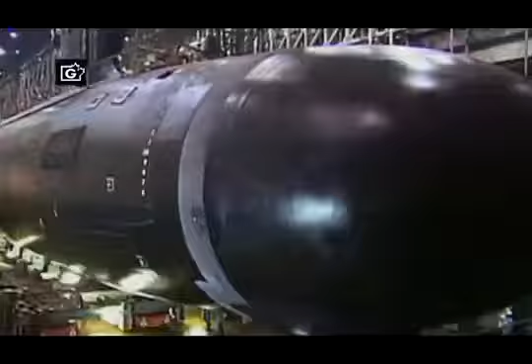The future of submarine warfare is here: the USS Virginia. Tricked out with high-tech capabilities that allow it to sneak up to a coastline and secretly watch and listen to potential enemies, ready to respond with unwavering force.

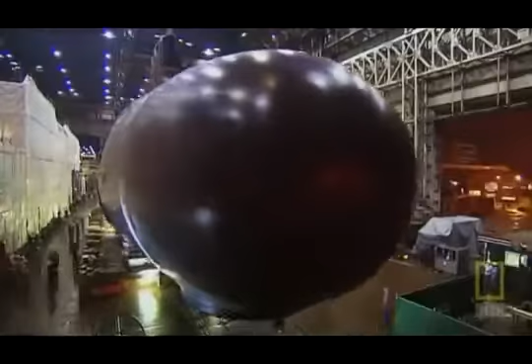This mega sub is in a class of its own: the all-new Virginia class. This is an amazing ship. Named the USS Virginia as the first of a new class, this amazing sub has staggering capabilities. It's the most advanced and versatile submarine in the world. We consider this like the Ferrari of the subclass.

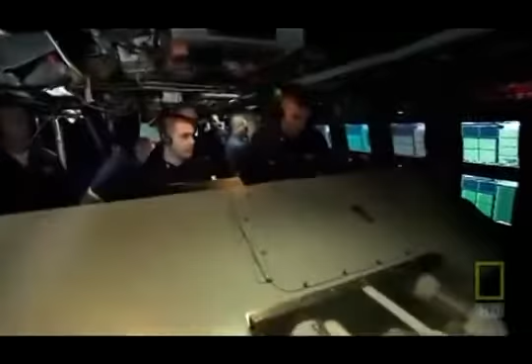It can launch attacks on other vessels using devastating torpedoes and can deliver cruise missiles 1,600 kilometers inland with pinpoint accuracy. To escape potential enemies, the USS Virginia can dive to depths of up to 240 meters.

But what elevates this new supreme sub to a class by itself is its astonishing spying ability. This sub has been called the ultimate eavesdropper, and for good reason. The Virginia has the most sophisticated sensors ever fitted on an American submarine. It can see and hear better than any US sub ever built.

But even with such technology, the Virginia must get in close to potential enemies. And she does, extremely close. She uses a revolutionary automatic navigation system, which allows the Virginia to inch itself through shallow waters to an exact coordinate. The question for a Virginia is how slow can you go? How well can you take that 8,000-ton submarine and control it in coastal waters a couple feet off the bottom? Can you move that ship inch by inch?

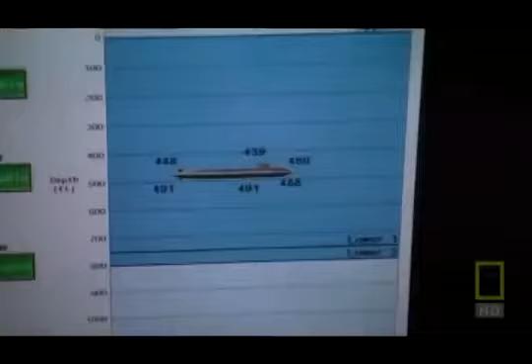Like a stealth fighter, it has the ability to remain undetected. But unlike the Stealth, the Virginia can stay motionless underwater for up to 3 months if needed. And we could be sitting there for days and weeks and years, and you'd never know we were there. This is a sub like no other.

With such covert potential, the Virginia's intelligence gathering is second to none. It can also deploy elite forces like Navy SEALs at a moment's notice. Such adaptability makes this sub one of a kind.

And the USS Virginia is one heavy sea creature. At 7,800 tons, it weighs as much as 1,600 killer whales. This monster sub is 115 meters from stern to bow. If you were to lay the Statue of Liberty down next to it, the Virginia would still outstretch it by 22 meters.

But how does such a beast move so effortlessly underwater? The dynamic thrust of this megastructure is a nuclear reactor. The design and operation of the reactor is top secret. But what we do know is that it's an astonishing powerhouse.

A compact nuclear reactor converts seawater to steam. The supercharged steam then spins the massive turbines, which in turn propel the sub. The reactor also powers all electrical needs for this high-tech super sub. And what's more, the nuclear reactor on the Virginia has a 30-year lifespan. Translation, it can go that long without ever needing to be refueled. That's twice the average lifespan of nuclear reactors on other US attack submarines.

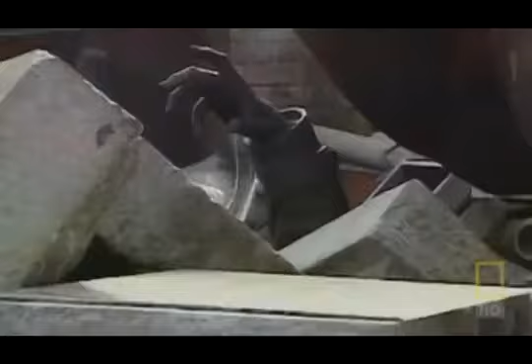But in the early 90s, the political climate dramatically changes. Almost overnight, the Soviet Union collapses. America's archenemy has simply disappeared. The costly arms race between the superpowers is no longer relevant. In this brave new world, it's inevitable that defense budgets are slashed. Every division of the military is a target for cuts. Submarines like the Seawolf class are simply no longer needed.

But as the 1990s develop, new enemies of the United States and her allies emerge. Small terrorist groups in tyrannical countries like Iraq and Somalia cause the military to rethink spending. If you look at the threats we're dealing with today, a lot of them are coming from third world countries, small countries, where we need to take the battle to them and prepare a battle space around their coastlines. What is the point of a huge navy if these terrorist armies have no sea power? Why does the US Navy need a submarine at all?

Good question, and one that was being discussed at the highest levels in the early 90s. In today's complex world, the military needs to be ever more informed of enemy activity. But US defense already has sophisticated spy planes and satellites. They can see every detail from several kilometers high. They also have better ground reconnaissance and a superior spy system. So what can a submarine offer?

But the Navy has set strict guidelines for the submarine designers. The new class of sub must have awesome spy capabilities. She must negotiate shallow waters with pinpoint accuracy. There, she must remain motionless for days on end, regardless of currents and sea drag. She must be able to deploy high-tech weapons to raid on an enemy whenever needed, and she must also be able to dispatch elite special forces like Navy SEALs. The new super sub must have stealth-like maneuverability and be able to disappear underwater for up to 3 months at a time.

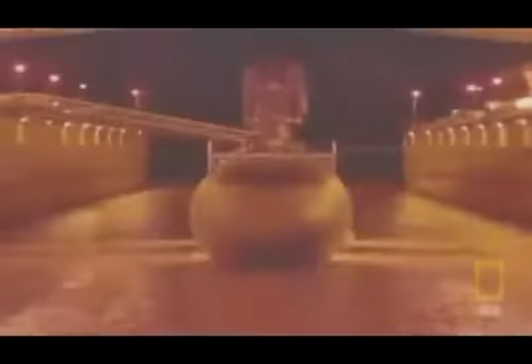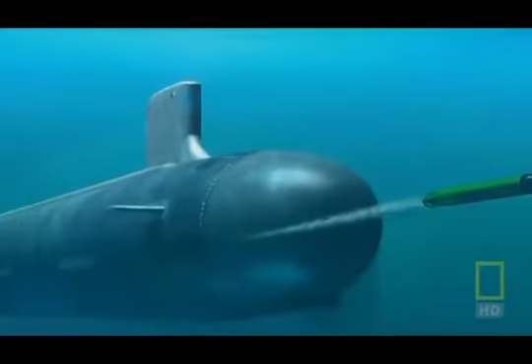It's a tall order by any standards, but there's a catch. They have one year less than it took to build the first Seawolf. And incredibly, there's an even bigger catch: it has to be made for 20% less money. With such constraints, there were many in the submarine industry who thought it was simply impossible. I think the reaction is always one of, how can we do that? We've never done it before. If the Navy can make this work, it'll provide a major new weapon in the US arsenal. But if they fail, all US subs could be in question.

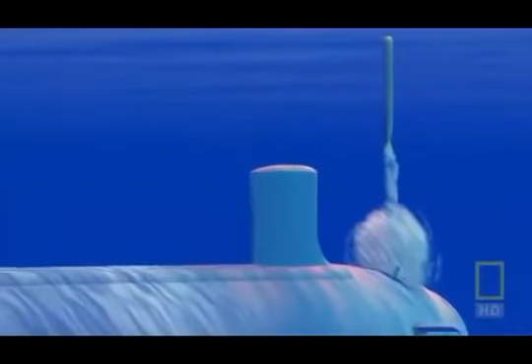It's 1996. The US government needs to get up close and personal with new terrorist enemies. The Navy insists that submarines can still help in this thorny urban war. They claim they can build a new class of submarine: bigger, better, quieter, and more deadly. But there's a catch, a big one. It must be built in less time and for a great deal less money than the previous attack submarine, the Seawolf class. With such limitations, this project looks more likely to sink than float.

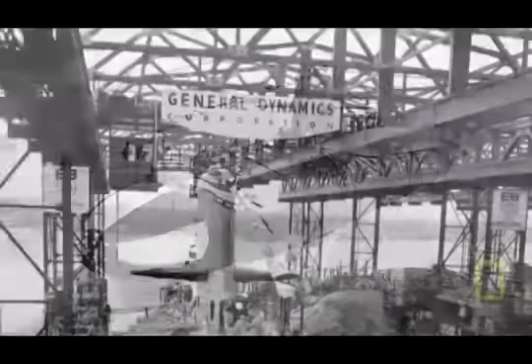The Navy decides to offer the mammoth design challenge to a trusted company, Electric Boat. Based in Groton, Connecticut, this company has enjoyed bragging rights that span over a century of ship and submarine building for the U.S. Navy. The first sub they built was the USS Holland for the Navy in 1900. The USS Holland revolutionized the U.S. Navy, marking the beginning of more than a century of military submarine building. Electric Boat's expertise is second to none, but some government officials already fear that this massive challenge may simply be impossible.

Despite the huge red flag, Electric Boat finally agrees to design and develop the new Virginia class. But to bring it in more cheaply than the Seawolf, they'll have to completely change the way submarines are built.

It starts with paper and wood. In the past, they would have drawn up initial plans on paper. Previous classes of submarines were designed historically, like probably any other large construction project, with two-dimensional drawings, blueprints. But the problem with two-dimensional plans is that different designers can't always view each other's layouts. If two engineers from different departments end up competing for the same space, it could lead to lengthy and costly delays. On this tight schedule and budget, there's no room for such error. It'll put the project behind schedule even before it started, and it could tip the balance and mean the end of the new super sub.

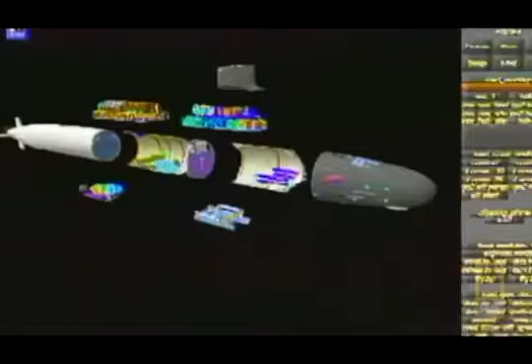The team needs another solution. They turn to new computer-aided technology, the benefit being that the whole model can be seen in 3 dimensions. This will mean that each department can quickly see what the other is doing. If it works, it'll save the company a fortune and help design a more efficient sub. But if it doesn't work, it could mean the new super sub is doomed from the start.

The president of Electric Boat finally decides to take the risk. He came in and finally took all the drafting boards out of the plant and said, okay, go for it on your computers.

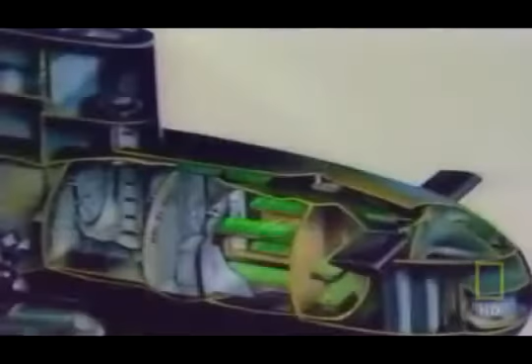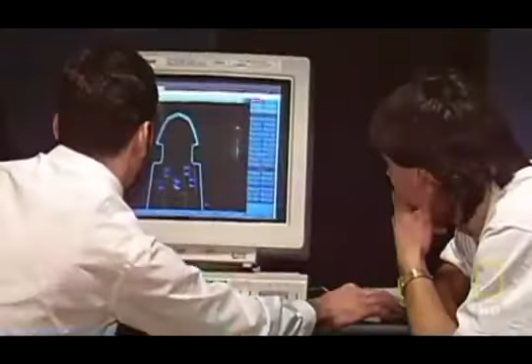Before the Virginia class, when a submarine was designed on paper, builders would then construct a life-sized wood mock-up of the plans just to make sure everything fit. But with the computer-aided design of the Virginia, that step could be skipped. All of the test fitting could be done right there on the screen. It is the first time that a U.S. Navy submarine is completely designed via computer.

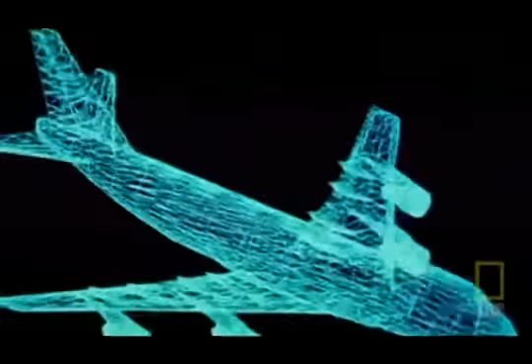And the program that would make this computer-aided design possible is already proven technology. Known as the CATIA program, it has effectively been used in the development of airplanes by the Boeing Corporation. Electric Boat figures there are enough similarities between a plane's fuselage and a submarine to take the plunge.

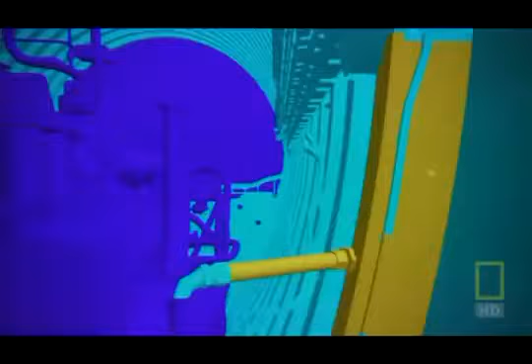It proves to be the right decision. All the various designers have access to the computer 3D model. This allows engineers to work in the same virtual space at the same time. Designers can now view all the plans to make sure they don't interfere with other layouts. The piping designer is running his pipes and I'm running my cables. We can go in and detect interferences day by day.

Every part of the ship is scrutinized for function and economy. So creating the sub on a computer seems to allow for the more efficient test fitting of systems and parts. But the next challenge facing designers is figuring out how to create spaces for people. Workers need room to do installations, and sailors need space to do their jobs. So in order to ensure those spaces are adequate, designers welcome the help of this guy.

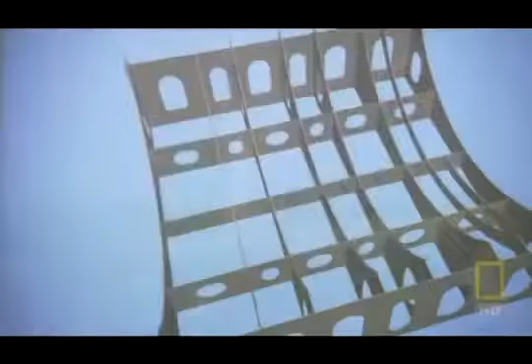Meet ErgoMan. ErgoMan is a computer-generated image of a human being that comes in 3 virtual sizes: 1.7 meters, 1.8 meters, and 1.9 meters. Whatever movements a human can do, ErgoMan can replicate. Then when the ergonomically correct envelope has been pushed and movement is made that is not humanly possible, ErgoMan clearly lets engineers know by simply turning that body part red, enabling the designer to adjust the space he's working on.

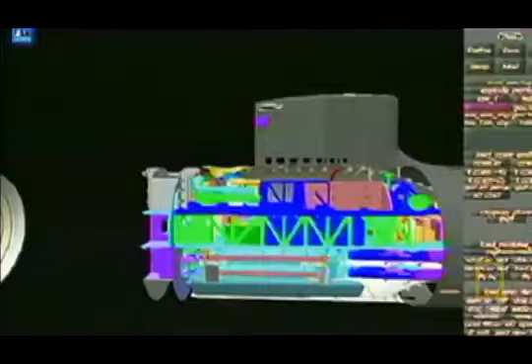This revolutionary technology could save the company millions in costly redesign. It could also guarantee that the crew will operate at maximum efficiency. The computer-aided design also helps in one other crucial way. The future of warfare is uncertain. To meet that uncertainty, this incredible sub must be able to adapt to new situations. As modern warfare changes, so the Virginia must adapt to meet it head-on.

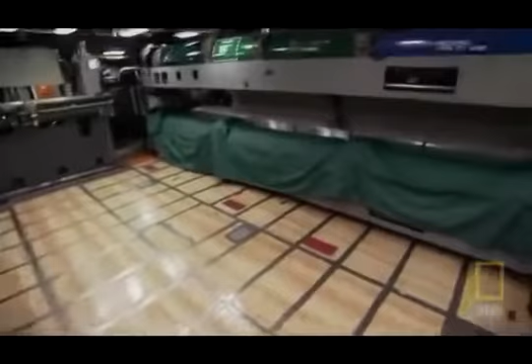To create this adaptability, the designers of this super sub create what's called a modular design that incorporates an open system architecture, meaning the skeletal structure of the sub includes large open spaces. These open spaces can house prefabricated modules such as weapon systems or sonar technologies. These modules can easily be inserted as one complete unit.

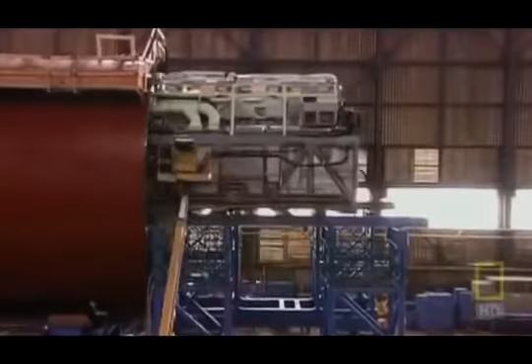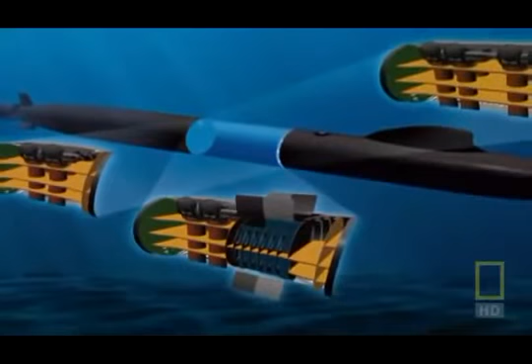This modularity will allow future versions of the Virginia class to house newly developed systems in the existing Virginia class layout, without the added expense of having to develop an entirely new class of submarine to house new technologies and capabilities. A remarkable cost-cutting development in the design of a submarine.

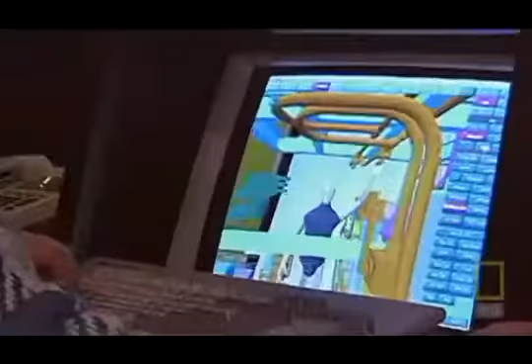If it works, this will be the most extraordinary submarine commanding the world's oceans. But designing it is just one problem. Making this ambition a reality is quite another. With an even tighter budget than past submarines, this is going to be a massive challenge to execute. And now there's a new problem. Having spent millions on the design, the Navy may not have enough money left to build it. It looks like the prototype of the new Virginia class may never surface.

The Navy is underwriting an enormous new project to build a new class of submarine that will be more versatile than any ever built. But it has to be constructed in less time and for less money than the previous attack submarine, the Seawolf. The design and development have been skillfully and successfully carried out by Electric Boat. And for the first time, a US Navy submarine is completely designed via computer.

It's a massive achievement, but there's a problem. The Navy's budget for the Virginia program is running out. It could lead to the end of the new super sub before it's even floated. But then Electric Boat does something unprecedented in its history.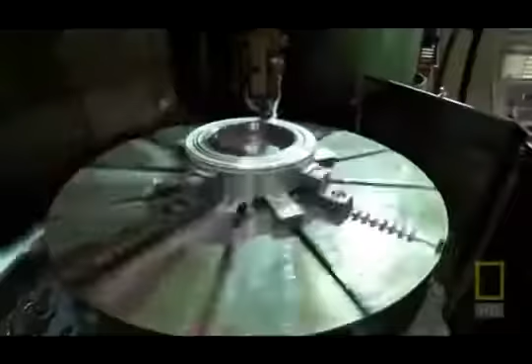For years, Electric Boat has been in competition with Northrop Grumman's Newport News, another heavy hitter in the shipbuilding industry. Now Electric Boat proposes that they combine forces with their old rivals and do something that's never been done before: build the submarine together, a process they call teaming. They figure that combining resources and brain power will allow them to work more quickly and more efficiently.

The proposed alliance can lead to massive savings, $700 million off the cost. But can these two historic adversaries put aside their differences and build a super sub for a reduced price? How can they manage such a massive project across two companies? As we've said, it's never been done before. But the allied companies must make it work. They have little choice, as the Navy has no more money to offer.

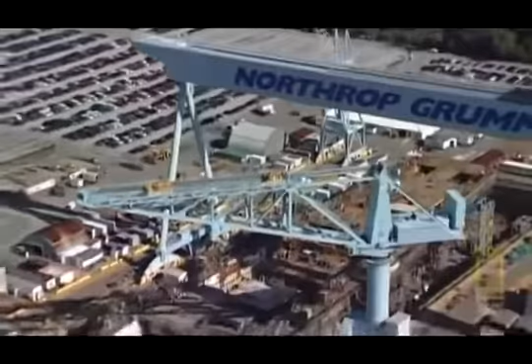Making a super sub for less money and in less time than previous attack subs will only be possible if the two rivals collaborate. It's a colossal and dangerous undertaking. If they get it wrong, it could spell the end of the US submarine program. This is a time when the Navy must prove a submarine's worth in a changing world.

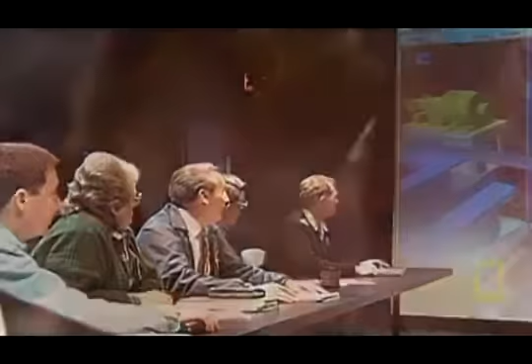The two-company alliance agrees that the only way to meet such demands is that there can be no delays. A major setback could erase any cost savings. But such efficiency in submarine construction is unprecedented. Is this project simply too ambitious? Could it be destined for the deep?

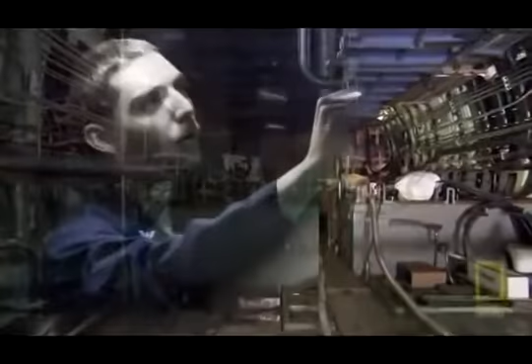In 1998, construction finally begins. Like all submarine building, it begins with the most crucial component, the hull. This is where the crew and weapons are housed. If it's not strong enough, the lives of hundreds of men are at stake, as is the multi-billion-dollar submarine. Not just a costly mistake, it would be a national catastrophe.

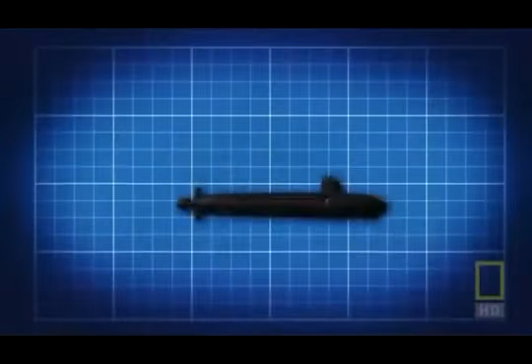Consequently, the hull for this sub isn't just made out of simple steel. It must resist unbelievable pressure. The Virginia class needs to reach depths up to 240 meters. Here, it's difficult for an enemy to find them, giving the submarine maximum safety from attack or detection. But at these depths, there's immense pressure. The steel hull must withstand a massive 26 kilograms of force per square centimeter—the equivalent of a dinner plate strong enough to hold up the weight of an elephant.

Getting the steel strong enough to endure such pressure is crucial. The manufacturing of this special metal is a military secret, but suffice to say, it's strong—extremely strong. But now the problem is how to bend such heavy-duty steel. They use a machine that supplies up to 4,500 tons of pressure, over 30 times the pressure exerted by a car-crushing machine.

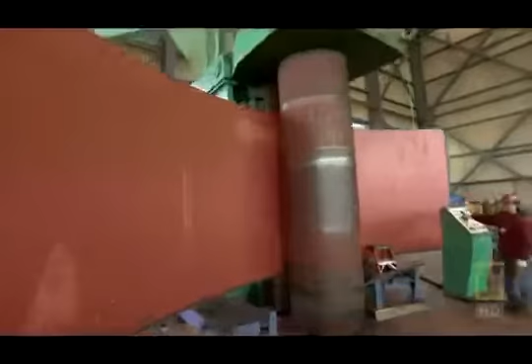The massive drum shapes and bends the huge plates of steel. Once bent into shape, the steel is mounted onto rib-like frames. It's then welded together into cylinders. This is a critical moment.

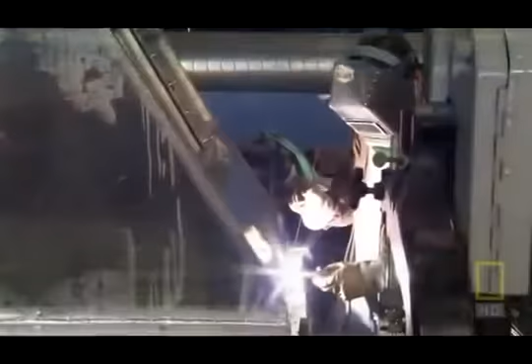In the past, this was done by teams of hand welders. But such are the stresses on a deep ocean submarine that even one bad weld could lead to disaster. There's only one answer: robots.

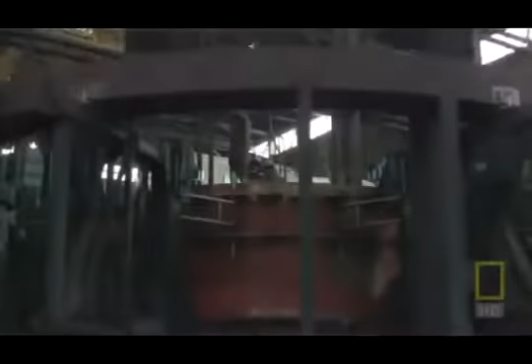These assembly robots can work round the clock and rarely make mistakes. The weldments that come out here are better than 99% first-time yield, which means the inspection process shows less than 1% failure rate. It's a costly business, but this is something that can't afford to fail at any price.

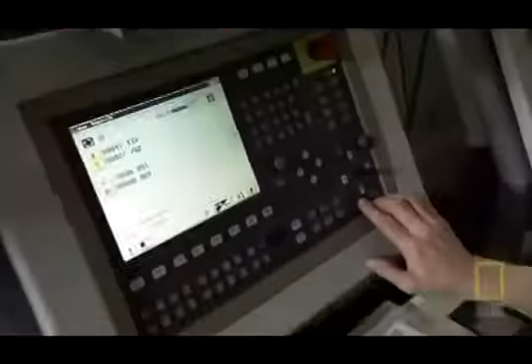To make sure the welds are perfect, they're inspected by X-ray. Any imperfections, such as an air bubble in the weld seam, could be just enough for the hull to weaken and give way to the crushing forces exerted deep below the surface. If the X-ray machine shows up any imperfection, it's meticulously repaired. Amazingly, once the seam is perfect, the welds can create a bond that is actually stronger than the original steel—a comforting fact when you're 240 meters below sea level.

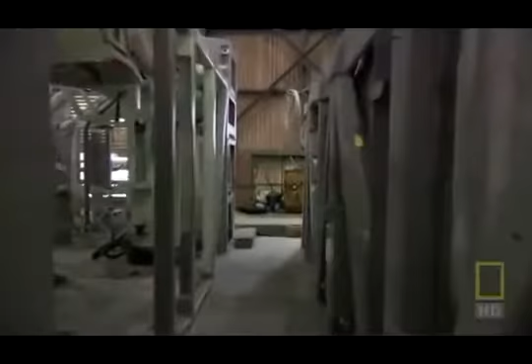Once the separate sections of the hull have been created, they start to construct the skeleton. Here in steel processing, they'll make floors, walls, and all the sections that comprise the submarine's framework. Again, robotic manufacturing reduces mistakes and speeds up the process, crucial when the alliance companies are desperate to cut costs and time.

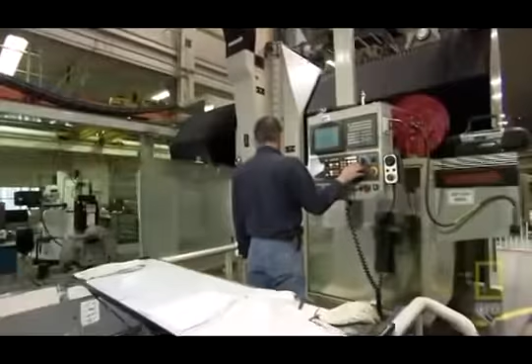Today, modern technology works with electronic data that comes right over the line and feeds the machines. This incredible laser marker is one of a new generation of robotic assembly tools, designed to eliminate human error. It's programmed to follow the computer design with better than pinpoint accuracy. Basically, it's the only marker of its kind in the free world that we're aware of.

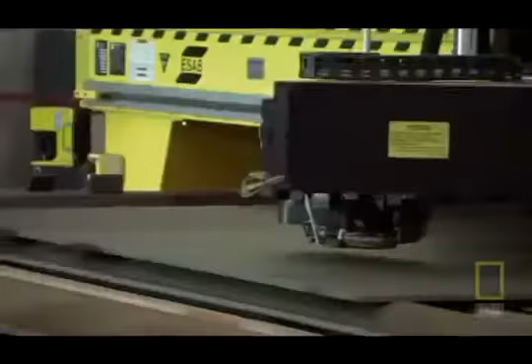But will this new technology work? It's never been used in submarine construction before. The machine passes quality control with flying colors. It's just one of many innovations in building this unique sub, and so far, the project is going well.

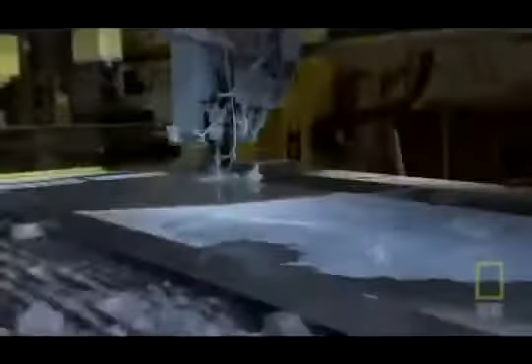Now the marked steel must be cut. But how do you cut such strong steel? They use a hugely powerful cutting machine known as an abrasive water jet. Here, a constant stream of water acts as the propellant for 80 grit flakes of garnet, which cut through the steel. The advantage to this method of cutting with a cold water propellant is that there is no heat-affected zone, thereby eliminating imperfections caused by expansion, contraction, and melting.

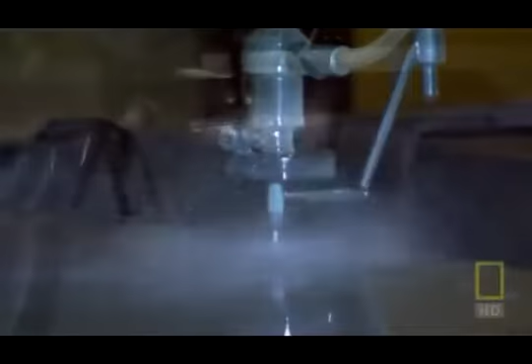Even though garnet is not the hardest abrasive that could be used, it's seen as optimal because it's hard enough to cut without causing too much wear and tear on the water jet's nozzle. The powerful cutting stream strikes the steel with 3,900 kilograms of force per square centimeter, strong enough to cut through a 30-centimeter thick piece of steel.

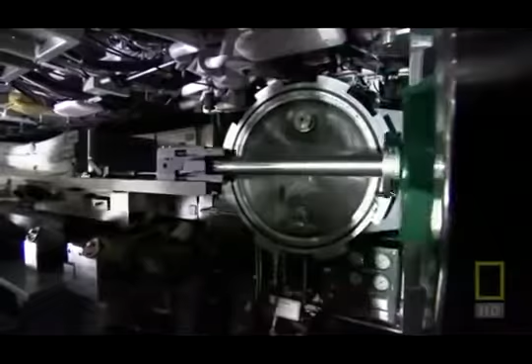Once cut, the sections are ready to be welded into place, making up the submarine's skeletal shape. While these sections are being built, other important modular sections are constructed in tandem. Living quarters and weapons are built outside the submarine before final assembly, allowing ease of construction. They can then be rigorously tested before installation.

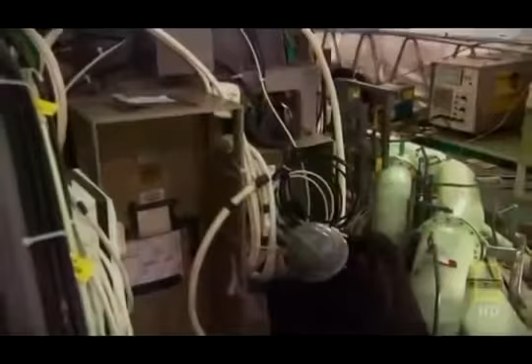The Virginia's command and control module is the most complex module to be built. It's the brain of the sub, where crucial functions are executed and surroundings monitored. It's also where the awesome weapons systems are controlled. If any part of this goes wrong, the whole submarine could be rendered inoperative and end in a voyage to the bottom of the sea.

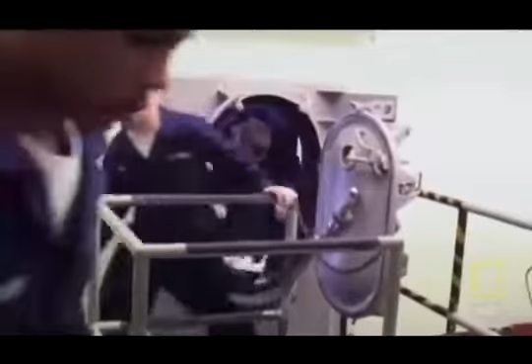So the Virginia's separate elements—the modular systems, the internal structures, and the outer hull—are built with efficiency. But these separate sections have not yet been integrated into a complete submarine. And without a complete submarine, the sailors destined to serve on the Virginia can't set foot onto it and get a feel for its inner workings. Yet they must have a working knowledge of the Virginia's unique operating systems when they're charged with manning the complete submarine.

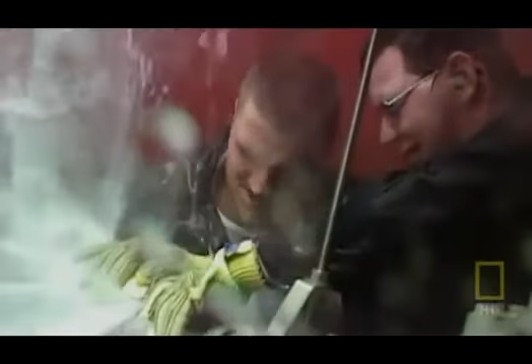So how do sailors prepare for duty on board this unfinished sub? The Navy would have to get creative to ensure that the human element to this mega sub, the US Navy submariner, would also be finely tuned for service. This is when the mission could sink or swim.

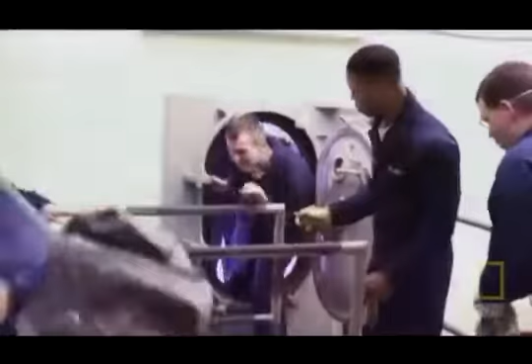The USS Virginia is a super sub in the making. Nothing like it has ever been built before, so there's no chance of gaining crew experience from other submarines. But the new sub must be fully tested before sea trials. That includes the crew—to operate this new class of submarine will require unique training. But this is a virgin sub, and no one knows all its workings. Like the rest of this project, this too will be a challenge for the Navy to resolve.

Training begins with every submariner's nightmare, in mock facilities like this fake engine room, built to simulate a flood. And even though these men are not on an actual sinking sub, this scenario is very real to them. They know that a flood could happen when they're at sea, and the only way to survive it is to stop the water from rushing in.

Flooding in the engine room! Flood control has been activated in the engine room. Pumps are manned. Damage control system.

In the heat of battle, the sub can't resurface because the enemy will spot it.

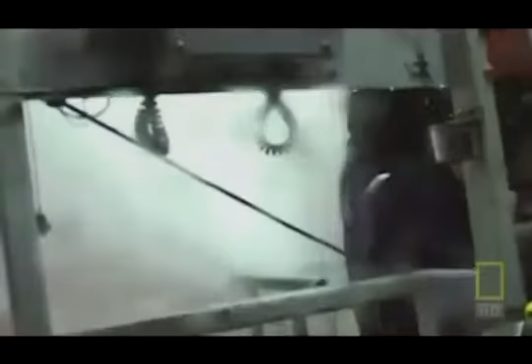If too much water gets in, the sub takes on too much weight, permanently ditching itself on the ocean floor. The men cannot escape through the hatch because they're so deep—the water pressure will crush them. If they can't stop the leaks, they will be trapped at the bottom of the ocean, buried alive in an iron coffin.

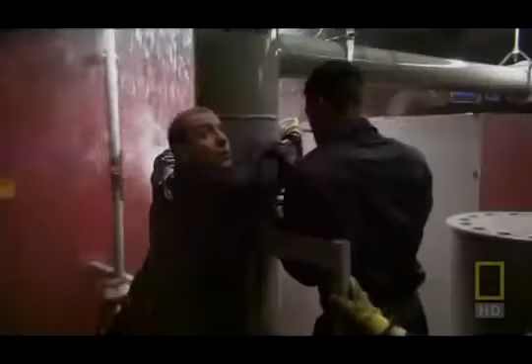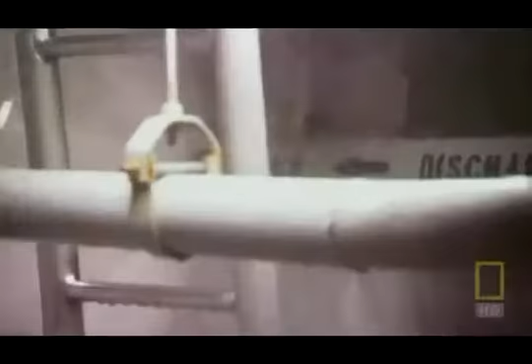These sailors are under the close scrutiny of their commanders. To block small leaks in pipes, the sailors hold plugs in place with rope they call bandit twine. For larger leaks, they patch the holes with rounded metal plates called strongbacks, secured with metal straps simply called bandits.

Commanders expect the sailors to keep their cool and keep their focus. Fortunately, after a rigorous and stressful series of tests, these sailors get the thumbs up from their commanders. These are good men to be spending months on end with, and that's what a sub is all about: living in cramped conditions and still functioning well in the face of danger. This is no place for claustrophobics.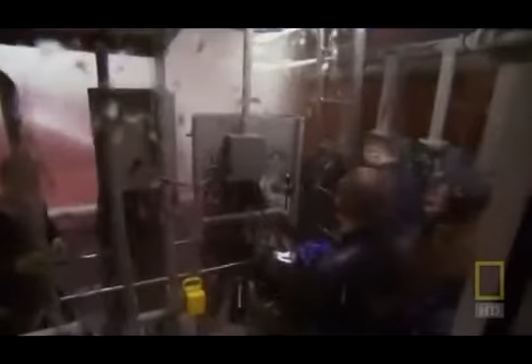Every sailor on board the USS Virginia, as well as any Navy sub, whether the commanding officer or the cook, must know how to mitigate against leaks so that all hands can be helpful should such an emergency arise. But submariners must do more than train for emergency situations.

They must also train to do the specific jobs they're assigned to, such as steering or sonar operations. This requires a familiarity with the sub's operating systems.

Sonar and navigation have traditionally been kept separate due to noise factors. Using new technology and space-saving design, these two disciplines have been brought into one central command post for the very first time. When we first started, it was overwhelming because traditionally, the fleet returning sonarmen that came to the Virginia had a mindset of the way things used to be, where we were in a room separate from everyone. We could set up the sounds we needed to hear in our room and no one else was distracted by them. But before sea trials begin, the specialist crew must get familiar with working together.

With little alternative, the Navy agrees to invest in building a simulator. Every detail of this high-tech simulator is a functioning replica of the future sub's control room. This is a very unique trainer - it's specifically for the Virginia class.

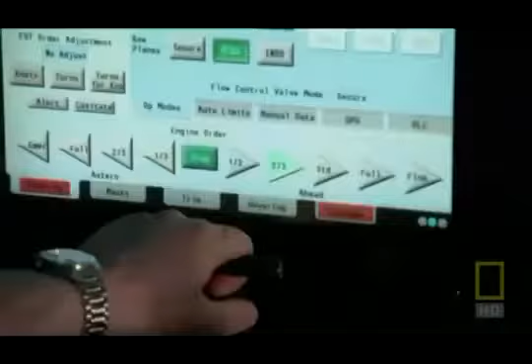For the first time, the crew get their hands on the same controls as the new super subs. We were confident that the ship was going to act very similar to the trainer as far as motion, but the procedures and everything we train on over here are identical to the ship.

One thing sonar operators on the new sub will have to get used to is working alongside their colleagues.

Sonar has always been monitored in separate rooms to avoid noise interference. But sonar operators destined for the Virginia must get used to working in the new shared space of the control room.

After initial reservations, the sonar team begin to see the benefits of working with other engineers. I think overall, in the big picture, it's a benefit. It gives me, as a sonar supervisor, a larger tactical picture of what the boat is doing.

Here in the simulator, operators will get their first experience of a revolutionary innovation. For the very first time, a US submarine is being built without a periscope. Normally, a periscope extends up to the sea's surface, and using a system of mirrors, it allows one person to scan the horizon.

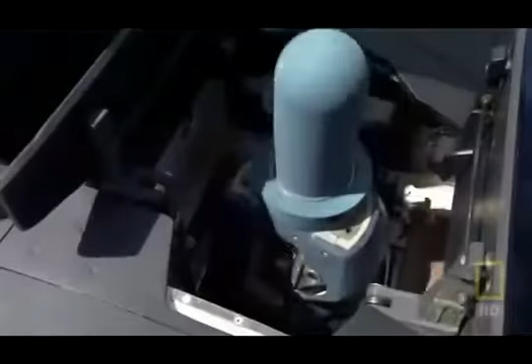But the ultimate eavesdropper needs to be much more aware of her surroundings. Instead of a periscope, she has a mast with multi-sensors and cameras that enable images from all sides. These sensors, known as photonics, are wired to various monitors in the control room.

For the first time in submarine history, everyone in the control room monitors surface activity. And because they're all in the same room, communication is much more responsive. Control, I'll brief them that we've gained an enemy warship.

While the crew is being put through their paces, construction of this super sub nears its end. The separate hull sections are outfitted with the internal elements they'll house, and then pieced together section by section until a full-length submarine finally emerges. By August 2003, the USS Virginia is ready for the water.

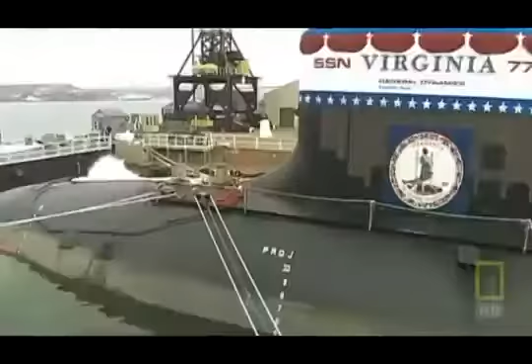Against all odds, the alliance companies have done it. They've built an extraordinary new submarine, more technologically advanced than any in the world. It's an amazing achievement. Right now, any celebration could prove to be premature. Unless they get the next and most important phase right, the whole project could become an expensive flop.

Virginia must now endure extensive sea trials. The super sub has to prove itself where it really counts, in the ocean. Often in the past, testing new subs has uncovered countless problems. These have proven to be time-consuming and extremely costly.

The USS Virginia has been built using revolutionary methods. Time and vast quantities of money have been shaved off the budget. But if this new super sub is to succeed, there can be no slip-ups during trials. It'll knock the whole project off course.

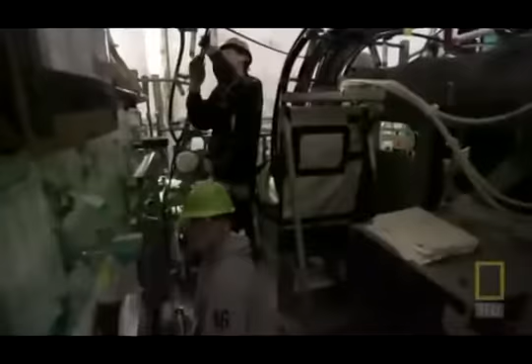The construction of the all-new USS Virginia is at last complete. It's taken 6 years and cost the Navy billions of dollars to build, but still less time and money than its predecessor, the Seawolf.

It's a mammoth achievement, but by itself, it's meaningless. The real test lies ahead.

If there are errors now, the huge investment could sink to the depths. It could take years to fix any problems that surface, likely putting the project beyond economic sense. It could even spell disaster for the whole submarine division. In the past, problems have been common at this stage, but this project simply can't afford to fail.

It's now do or die for the new Virginia class.

August 2003. The USS Virginia is finally launched. Over the next several months, they will put the sub through extensive tests, known as alpha trials.

This is when things can, and often do, go wrong. Previously, subs would factor in time for repairs, but in this new economic climate, the Navy and the Alliance simply don't have that luxury. The Virginia must ace the test.

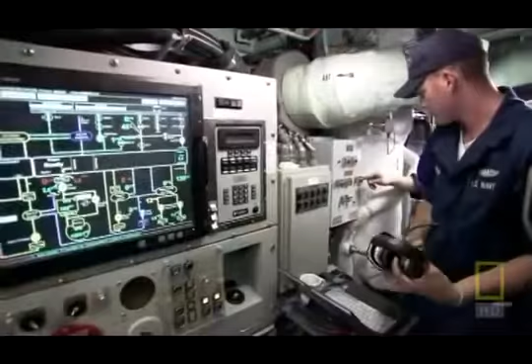Historically, the first ships of a class wind up with significant problems. As the USS Virginia heads out on her maiden voyage, the captain and crew will begin testing all her major functions. All the sub's technology must be tested.

They start with sonar. It is the traditional way a submarine sees, even through murky water. The system is based on transmitting and receiving. The main feature of the system is the sonar sphere, housed in the nose cone.

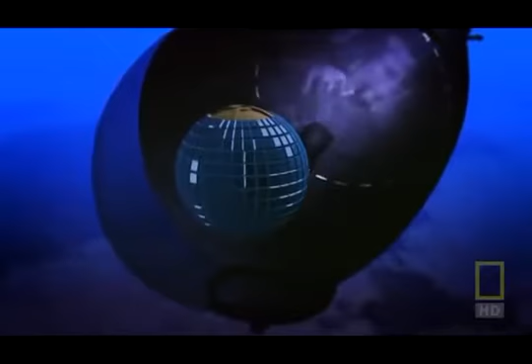The sphere is lined with hundreds of hydrophones that act as the ears of the sub. They're called passive sensors. Their job is to listen to all sounds coming from outside the sub. A giant baffle protects the sonar sphere from internal noise interference.

The sonar sphere also has what's known as active sonar capabilities, which is when the sonar releases noise pulses and gathers a clear picture of the sub's surroundings based on the bounce back of the sound waves.

Along with the sphere at the bow, there are 6 side-mounted sonars, 3 on each side. These provide a more complete picture of the submarine's surroundings. There's also sonar that can be released from the back of the sub and towed with a line. This area behind the sub is often referred to as the blind spot and would otherwise be vulnerable to attack.

Because the Virginia is built to operate in shallow waters near coastlines, it is likely to encounter minefields set up by enemy forces to keep our Navy ships out of their waters.

These mines are typically scattered throughout the water, anchored into position with chains. Because of this danger, the USS Virginia is the first submarine in the fleet to house a chin array, which works in combination with a sail array to provide a better picture of what lies ahead and make it more effective at spotting mines so that they can avoid them or detonate them from a safe distance before running into them.

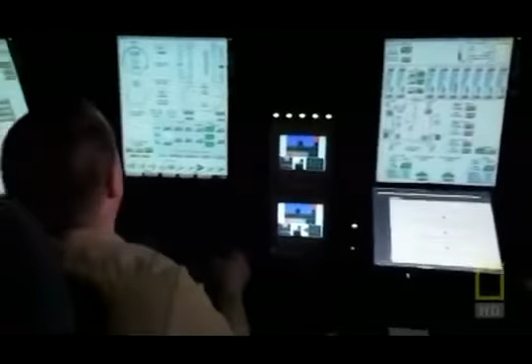If the Virginia were to park itself on the ocean floor, currents and tides would cause it to drift. But the Virginia's automated hovering capabilities allow it to maintain its position near the ocean floor, compensating for currents and tidal forces. The Virginia's unique ability to remain locked into position provides another major innovation.

As the sub can remain in a fixed position, it's easy for elite forces like Navy SEALs to swim in and out of the escape hatch. No other US submarine has a more effective way of deploying special forces.

No other class of submarine in the fleet has a built-in Navy SEAL staging area. This 9-man lockout trunk allows an entire team of SEALs to exit and enter the sub. Once out, they grab mission-specific supplies from lockers located in the fin-like structure on the top of the submarine, known as the sail. And then they're ready to make their quiet approach to land.

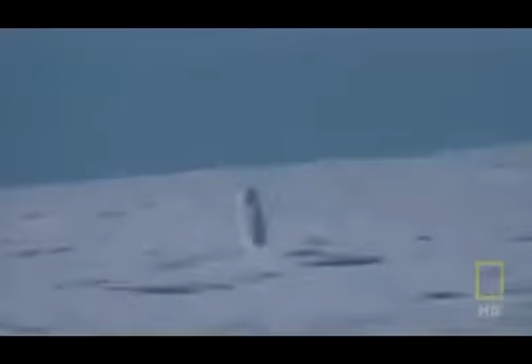And if the Navy SEALs need fire cover, there's more than enough on board. The Virginia comes fully armed. There are 12 rocket launchers for firing Tomahawk cruise missiles. A target up to 1,600 kilometers away can be strategically destroyed. 4 torpedo launch tubes are ready and armed to eliminate any surface threat.

But when it needs to, the Virginia can simply disappear. To remain stealthy and avoid detection, the Virginia is designed to maneuver in total silence. The Virginia-class sub has a giant duct around its propulsor for noise reduction. And the entire hull structure is covered with a rubber-type coating designed to make it more hydrodynamic.

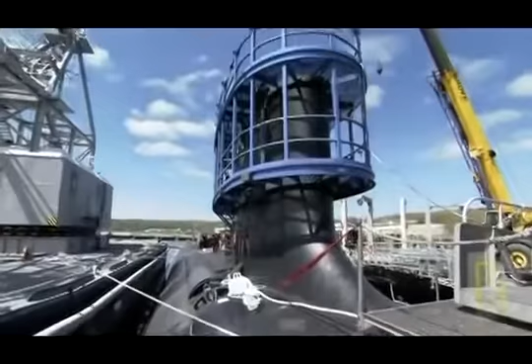It's much like driving in your car at high speed down the highway. If you have the windows rolled down, you can't hear the radio because of all the air noise blowing by you. Much like Virginia, when we're driving fast with all this flow noise, we can't hear from our own sensors. So we want to quiet down the ship as much as possible, make her hydrodynamically smooth so there's not a lot of flow noise so we can hear from our own.

Without the combination of these noise reduction technologies, the Virginia couldn't even hear its own sensors. The sound dampening allows them to hear and know what's out there.

After rigorous testing of all the new systems, technologies and crew members, at last the alpha trials are over. To everyone's amazement and utter relief, the USS Virginia has passed the alpha trials with a clean sweep.

And it was great to see it return after alpha trials and understand from the 4-star admiral getting off that ship that it performed flawlessly, that he was very pleased with its design. They came back with a broom on the sail, which to us signifies a clean sweep. A clean sweep means the ship passes every facet of the test.

It is one of many stellar performances. All the trials that I've accomplished since in command have been a great success. The ship has exceeded its expectations in every trial. This truly is a remarkable design.

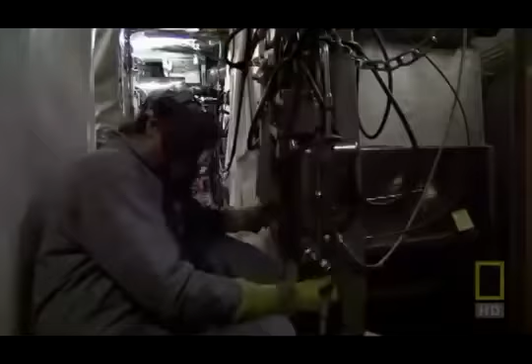The USS Virginia is hailed a landmark achievement in submarine history. The design and build of the Virginia is so successful, it could be put into service a full year ahead of schedule. The Virginia's readiness for service proves that the computer-aided design approach to creating a new class of submarine is the way to go.

And that new technologies, combined with the resources of two rival shipbuilding companies working as a team, can yield an affordable submarine with new capabilities.

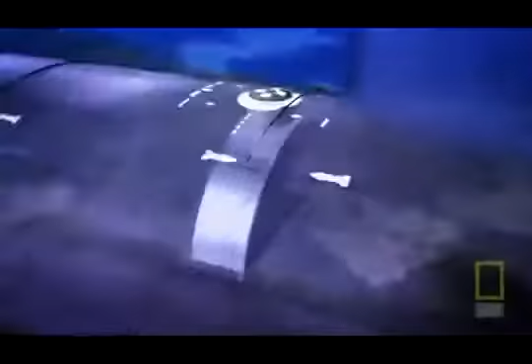When parked in shallow waters near coastlines, it can support ground force operations and participate in land-based military activities. New capabilities allow this new class of submarine to be more than a warship built to engage enemy navies in the open ocean.

The USS Virginia, the first of the Virginia-class submarines. The conflicts that this new breed of submarine are destined to face over the course of the next few decades are unforeseeable, and many of its missions may never be known because they're likely to be top secret. What is known is that whatever its destiny, the USS Virginia is poised to answer the call of duty.